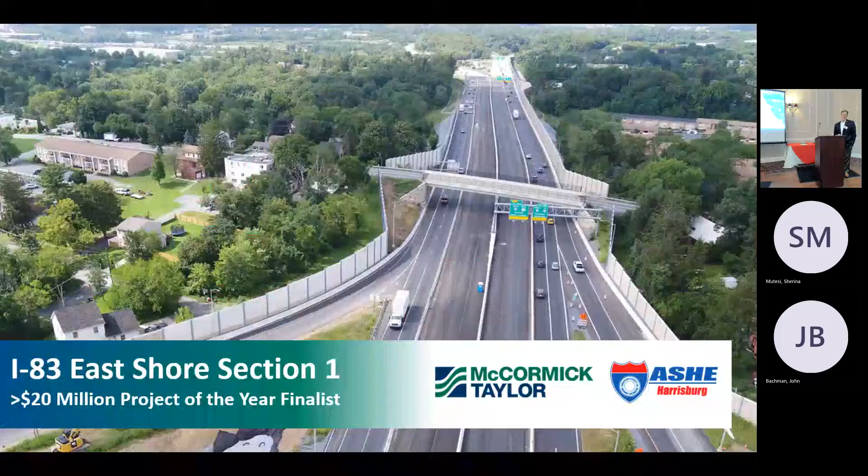The clicker is not working. I think it should work. You can try it. Okay. Just give me a minute. No, Alan's sitting behind you going, no, it's not going. Just say, next. We'll see. Just give me 1 second. I'm gonna share presentation. Okay, oops. We could just, there's only 6 or 7 slides, so. Here we go. Does your clicker work? Try. All right, I'll help you out. You could roll through them, no problem.

No, it's a pleasure to be here tonight. Pleasure to be recognized, to have McCormick Taylor recognized for the project. This is one of those projects that's really an industry project from my perspective. Matt here is the designer of record. He had a lot to do, obviously, with the project. This is one that, if you go to the first slide in the presentation, gives you a little sense of how long it was around.

As long as the clicker. Really good. We need to pull up some of the scholarship winners. Yeah. Try this again. There we go. Is that your first slide? Go ahead to the next one.

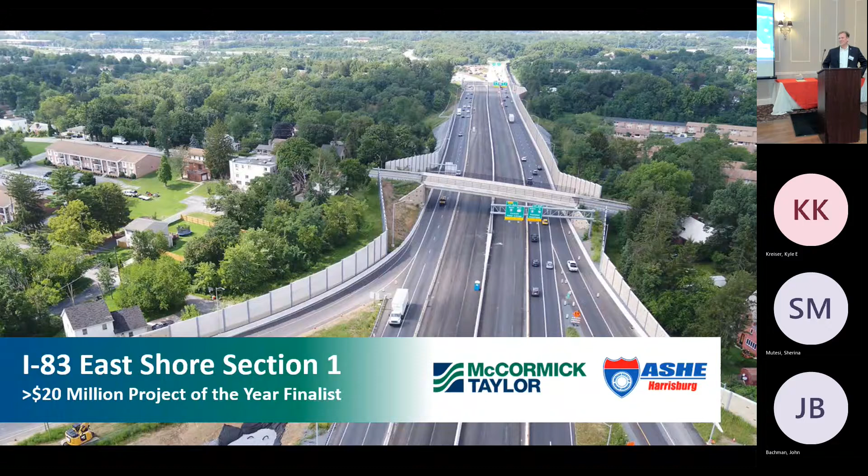The price of gas, $1.37. So we'd like to go back there, right? But that was one of the first photos that we found when we were looking through and doing the I-83 master plan. East Shore Section 1 did not start 20 years ago. It did not take that long to get going, but the master plan really created the foundation. The master plan was developed with a lot of good leadership from District 8, and the staff were there, and a lot of political support. Ron Marsico, Piccola, Schumacher, representatives and others.

There were a lot of interim projects that just spun out before we even got to East Shore Section 1. Safety projects; the corridor, as everyone knows if you've driven it, was a safety issue. A lot of tight ramps, yield control, the whole thing. So there were a lot of interim projects done, a lot of safety improvement projects that really led up to this. Like I said, these are really awards about the industry and how much of an impact. And I think all the scholarship award winners probably weren't even born when the master plan started, but it takes a long time to develop these types of projects.

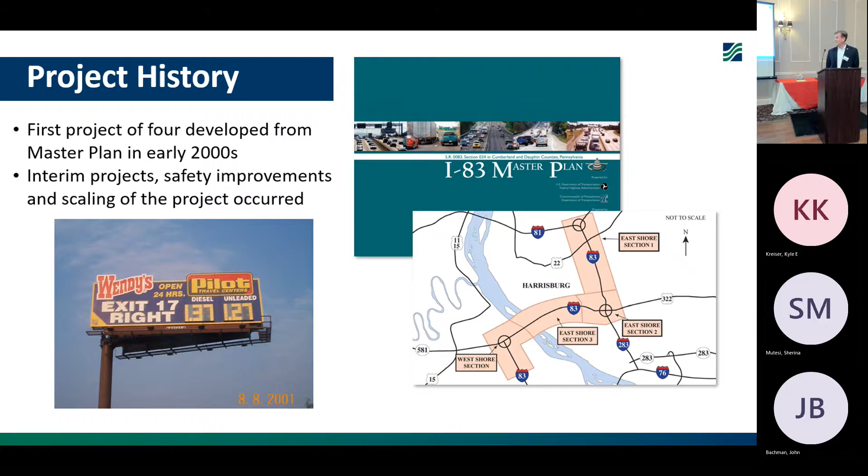East Shore Section 1 was $150 million construction in total. We got to the end. So go to the next slide, Jason. I'm just going to walk you through a few of the project details. The entire stretch here is shown in pink. That was the second contract. There was an early action, or contract one, shown in yellow. It really dealt with some of the interchanges and the overhead bridges on both sides. The pink or magenta on the screen was the main construction project, which involved the widening of 83, a single lane in each direction plus auxiliary lanes between Union Deposit and Colonial Park.

Early on, there was a lot of talk of an alternative analysis at Colonial Park at the 22 interchange, looking at continuous flow. At one point in the master plan, there was a flyover structure to handle the intersection there by the mall. But when it boiled right down to East Shore Section 1, we just did the widening and reconstruction, the overhead bridges. Again, reconfigured the Union Deposit Road interchange and then did a number of retaining walls and sound barriers and such. That's a little overview of the job. Like I said, $150 million, I think, between the two contracts and construction.

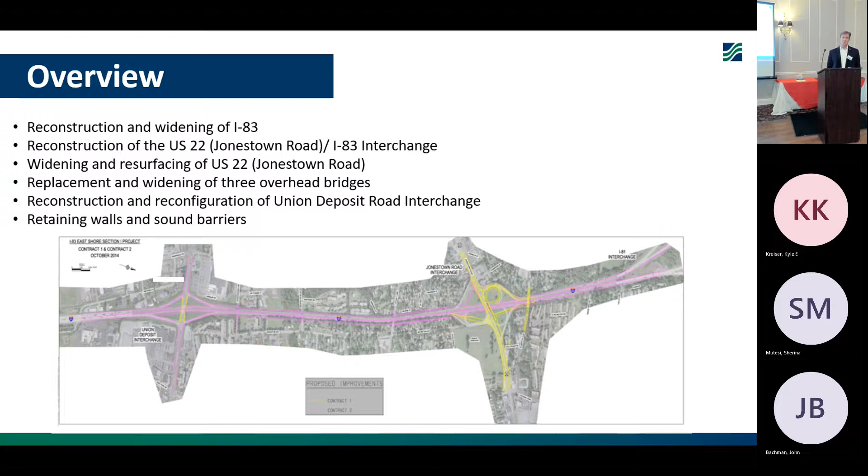Go ahead, Jason. High traffic volumes. We were at very high volumes, over, I think, 90,000 ADT at times. 113 parcels.

The traffic control sheet set was 300 plan sheets, so complex from a traffic control standpoint. John Schulz had a lot to do with that. Becky Meese, who's here, was involved in the preliminary, as was I, doing a lot of the traffic work and other things all the way through to the final design element and piece.

We had a team at the end. I'll go through all the subs and partners we had from a design team standpoint. Joe Thompson did a lot of the bridges and the mainline structures over 83, was responsible for those. So you can see the before and after on Revere Street.

I think we probably gave John Bachman, who was the PennDOT PM, a lot of credit for this job, and the whole I-83 corridor with his career. But we probably gave him some heart attacks with all the renditions of Revere Street and the right-of-way impacts and everything else we did there. It was a complex project for sure.

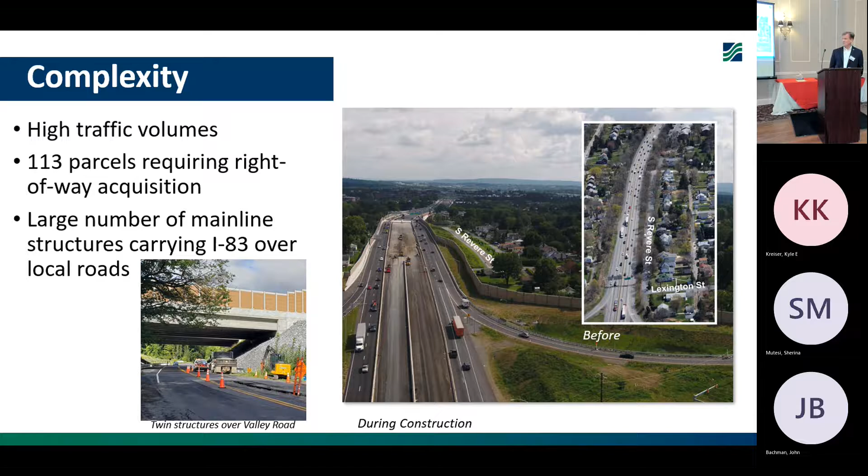Go ahead, Jason. We did some accelerated bridge pieces to get things in place and done earlier. The construction and phasing of the 22/83 interchange was unique and innovative. We did some early safety improvements there, reconfiguring the signals and ramps to get those built. If you remember, there used to be two on-ramps sequentially in the southbound direction — we eliminated some of those early. We also did variable speed limit signs during construction to help with traffic control and safety. Next slide, please.

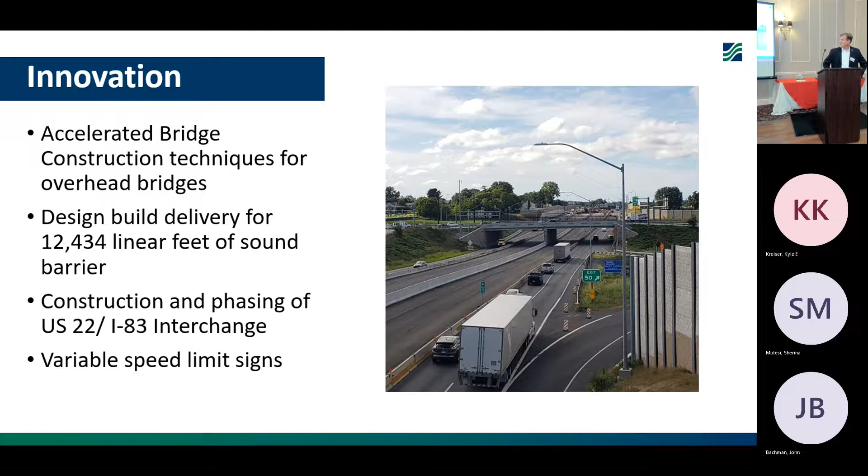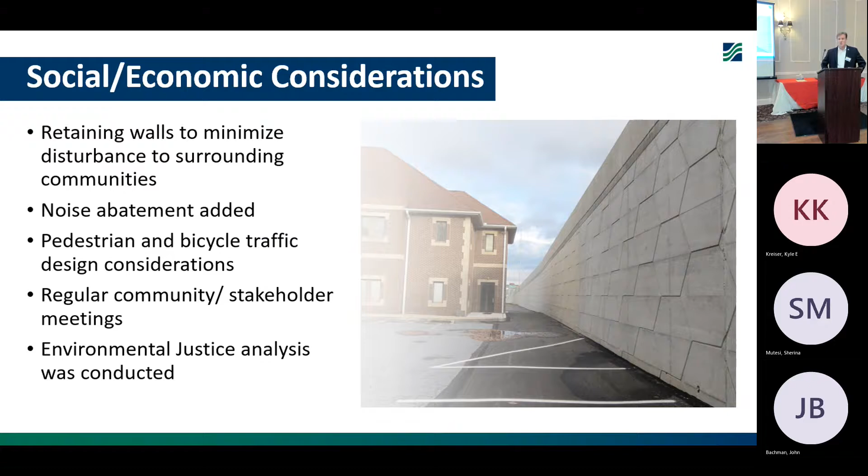We had some tight corridors. That's a retaining wall immediately adjacent to one of the buildings, from a right-of-way standpoint, with noise abatement throughout. The prior slide showed about 12,000 feet of noise walls, and pedestrian and bicycle accommodations on Elmerton — the 22 corridor was heavily used as well.

There were times during the slowdown from a funding standpoint where we packaged and repackaged the project. At one point, East Shore Section 1 was in 5 construction contracts — we broke it into 5 to keep it going and keep it moving. But through all of that, we maintained outreach to the public and made sure we were doing all the coordination needed with community and stakeholder meetings.

From a safety standpoint, we've had a huge crash reduction with the auxiliary lane connections between Union Deposit and Colonial Park. We've had a lot of impromptu comments from the community saying what used to be the worst stretch of roadway is now possibly the best. So from a community, social impact, and safety standpoint, this project — although it was a big investment of $150 million — I think made a huge impact on the number of vehicles it touched and the community improvements as well.

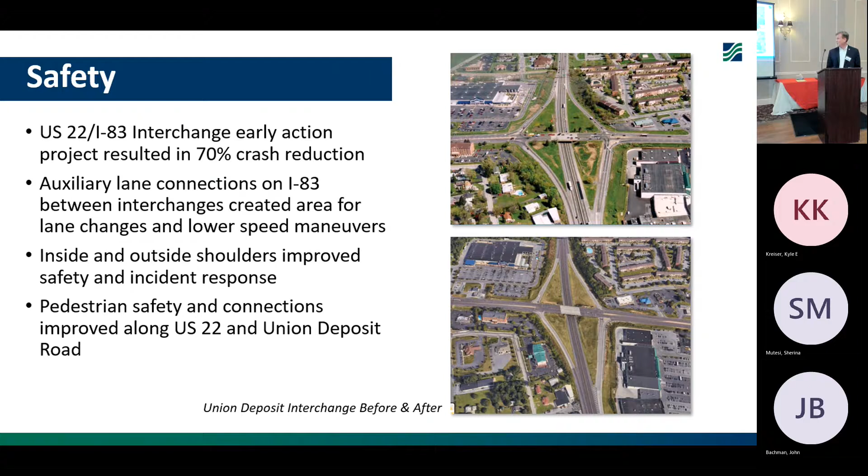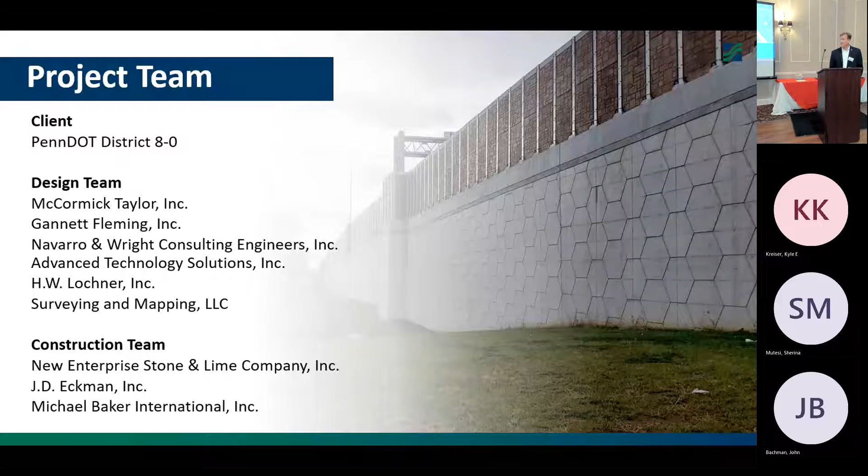The client was District 8. A lot of kudos go out again to John Bachman and the management team at District 8 over the years. Gannett Fleming was a major sub for us on the design team, along with Navarro & Wright, ATS, Lochner, and Sam. These things don't get built without the clients and the construction side of the shop — Baker was the construction manager on the job, New Enterprise had one of the contracts, and J.D. Eckman had the other.

Thanks, Brian. Yeah, I traveled that stretch today, and it'd be nice to get the Eisenhower interchange also done. We'll get there. I just can't believe the amount of truck traffic still, but that widening of 83 up through there really is nice. Everybody should be proud to be part of that project.

It was a great project, one of the largest projects in our ASHE district. The ASHE project awards cover the District 8 geographic boundaries basically, so those are the awards we give out by ASHE Harrisburg.

So our final award — and by no means the least award — is the first place for over $20 million, and that goes to the project I-83 Exit 4 Interchange Improvements, PennDOT District 8. The award-winning firm is Gannett Fleming. Accepting the award tonight is David Hamlet, Vice President, Highway Section Manager, who was also the project manager for the project, and assisting him is Nate Kirchner, Assistant Project Manager and Roadway Lead.

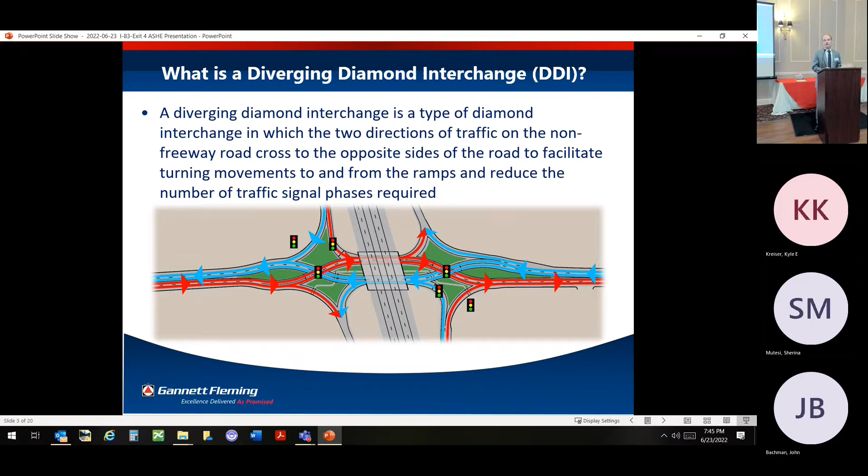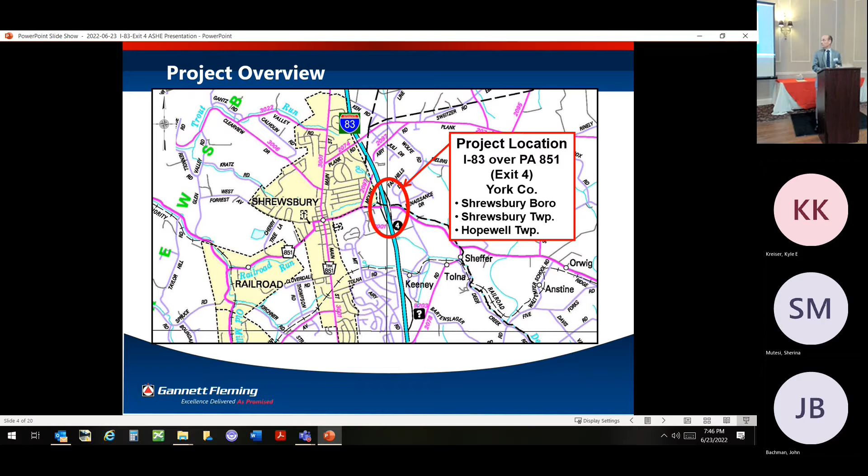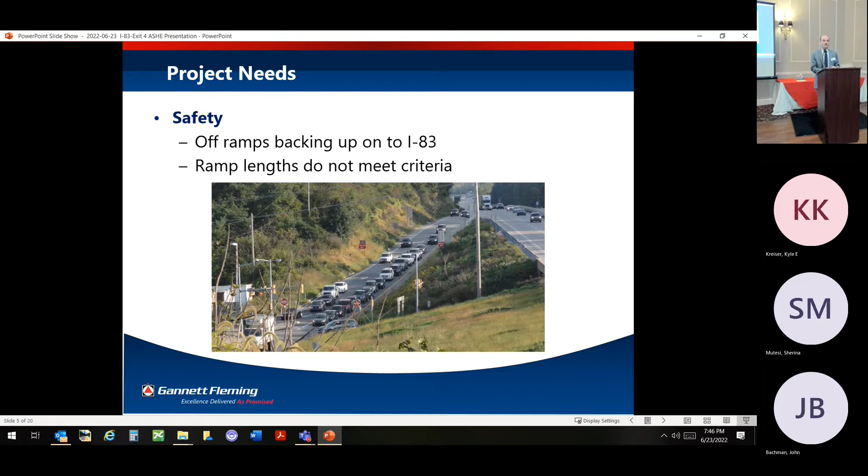Our project is the first exit on I-83 coming from Maryland, and that'll play a part into things a little later. As far as the reason for the project, the main reason was safety. Traffic was backing up onto I-83 in both directions, morning and evening, and that's a dangerous condition. Also, the ramp lengths didn't meet criteria. Congestion was a big issue - it was a real tight diamond design.

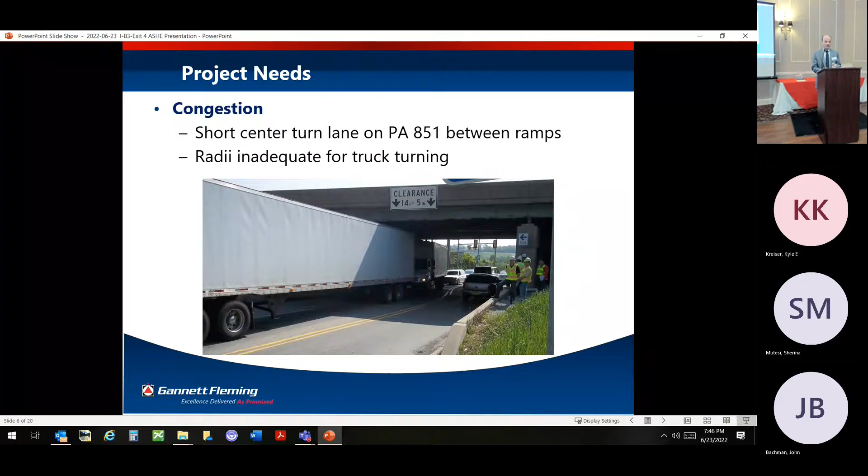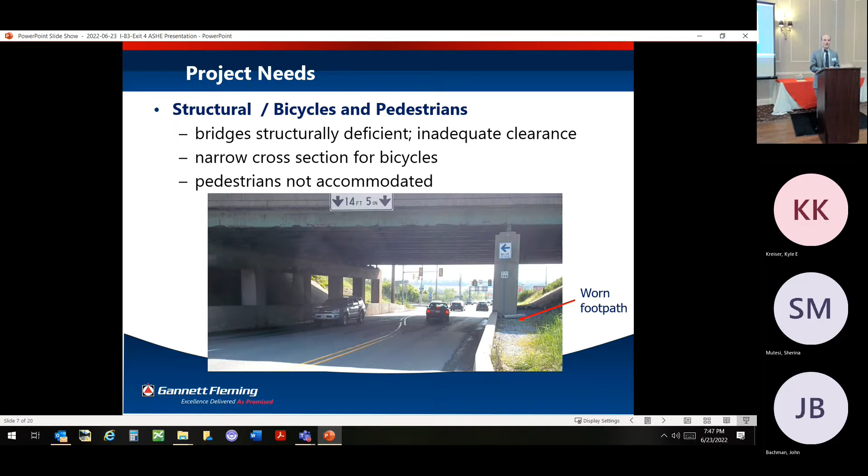The photograph shows you it only takes a truck or two to get the whole intersection clogged up, so congestion management was a big part of what we did. Trucks also couldn't make some of the turns - the geometrics just wouldn't allow it. On the bridge side, our bridge was structurally deficient, with substandard vertical clearance. And as you notice, there's no sidewalks, so it was really tight for bikes, with no place for pedestrians. These were all needs on the project.

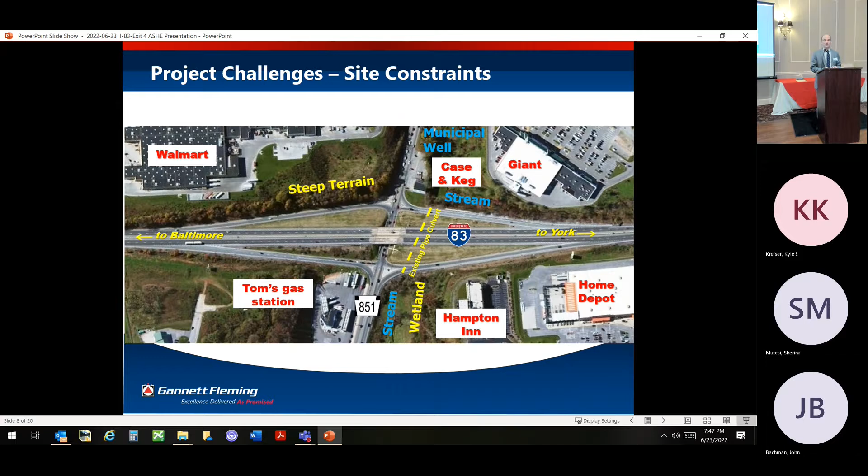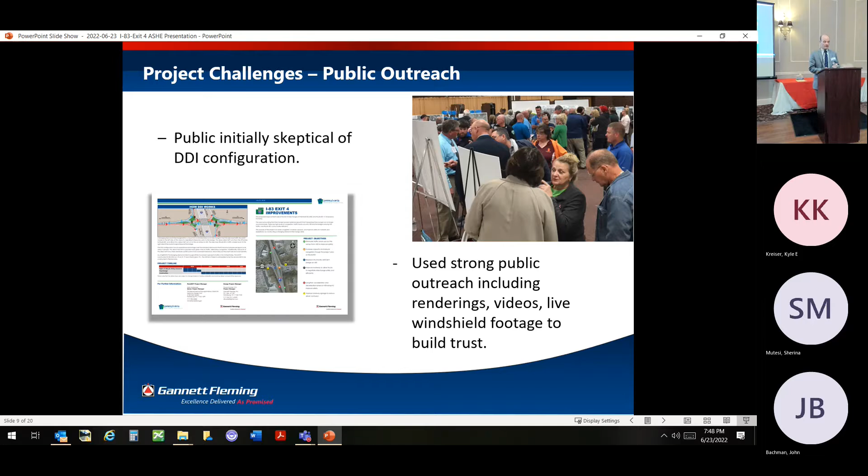Like the other projects, Herr Street and East Shore Section 1, this project had a lot of challenges. The first being site constraints with Walmart and Home Depot and so many businesses close by, plus natural features - streams and some steep topography that made it really difficult to get a design that would fit. Public involvement is always a challenge, but especially for a new idea. At the time, there was only one diverging diamond in Pennsylvania that had just opened as we got into the design process. So it was a new concept, and we had to sway public opinion, which we successfully did. That was definitely an important challenge to overcome.

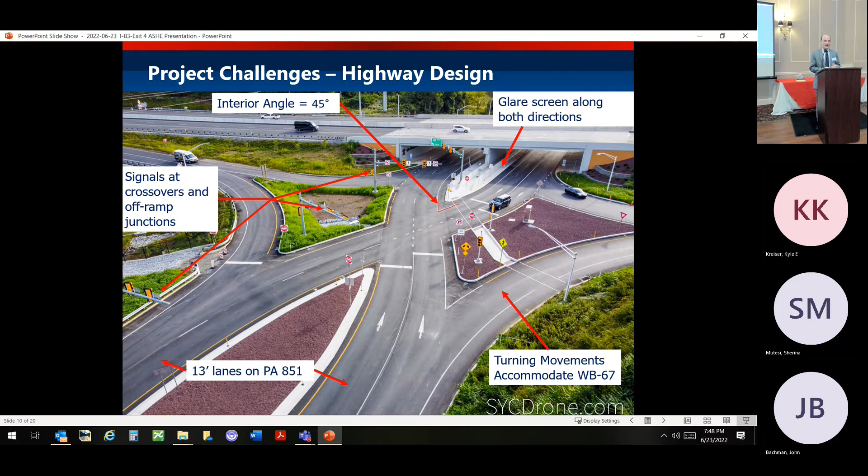Just the overall design of the DDI - there's a lot that goes into it, and Nate, our lead highway designer, could talk an hour just about this slide and everything he needed to do to get the diverging diamond to work properly. You can read the bulleted items there, but there's a lot of thought, a lot of science that goes into the DDI.

Structural challenges: we needed to maintain 4 lanes on I-83 at all times, which wasn't easy with the width of the existing bridge. We also needed to correct for the vertical clearance, so we raised up 83 a little bit. We did this through staged construction. We over-widened the bridges so they would allow for 6 lanes in the future. We also had a real long, deep culvert that went underneath the interchange, and that had to be replaced - that was a big challenge too.

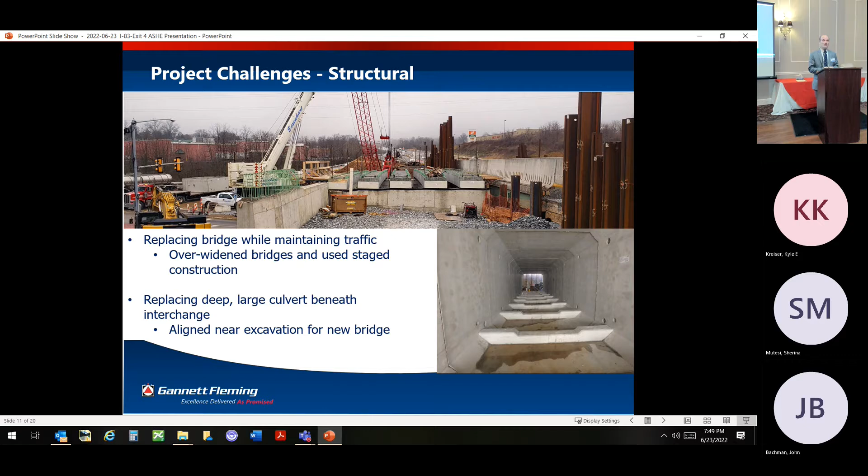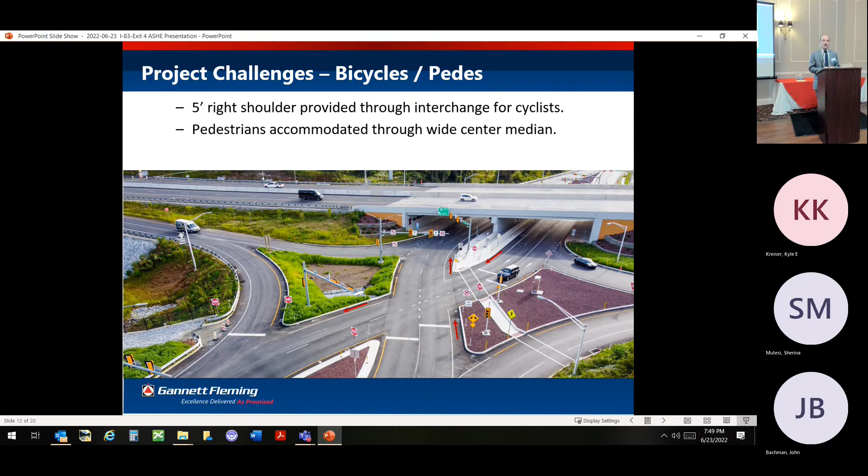The contractor had a lot of fun with the shoring and sheeting on that to get it constructed. Then for bicycles and pedestrians, we had a 5-foot shoulder through the interchange for the bikes. Because we had a wide median, we ran the pedestrians through the median under the bridge, and you can see the crosswalks taking them back out to the side.

Signing and pavement markings, again, a new interchange, a new concept. You need to pay a lot of attention to the details so that as you drive through, whether you're used to a DDI, whether you live in this area, or if you're out of town driving through for the first time, we want to make sure that it's clear and it's safe. So that was the challenge as well.

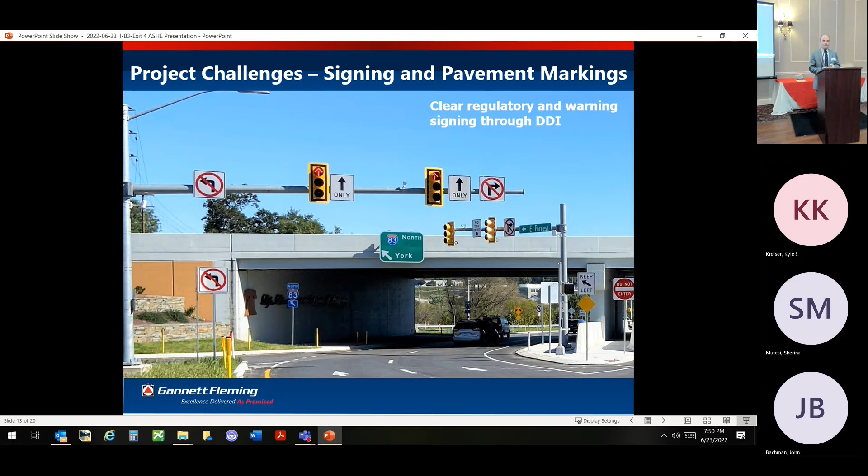Environmentally, we had bog turtles to deal with, making sure that no bog turtles were harmed by the project. We had a municipal well close by, so we had a detention basin, we lined it, we put a gate in there so that we could contain any spills that happen in the future. We worked really closely with the wellhead protection group also.

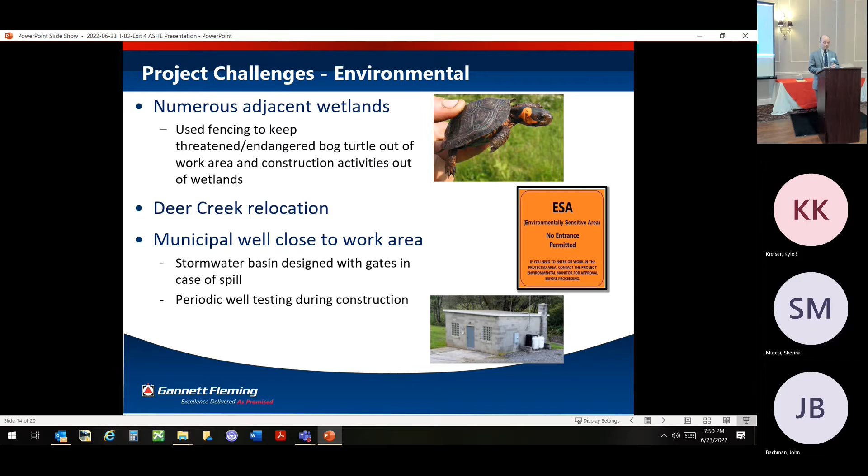And aesthetics, I think this is one of the things that really makes Exit 4 special. District 8 wanted to do something a little bit different since Exit 4 was the first interchange in Pennsylvania coming up from Maryland. They wanted a welcoming statement, so we came up with an Americana theme, and we wanted to be able to kind of soup up the interchange at a modest cost.

The VFW paid for the flag and the flagpole. There were a lot of civic organizations, and all 3 municipalities signed an agreement to help out. They'll take care of litter control, and they'll take care of the minor maintenance on all of the plantings, the shrubs, and keep the interchange looking nice.

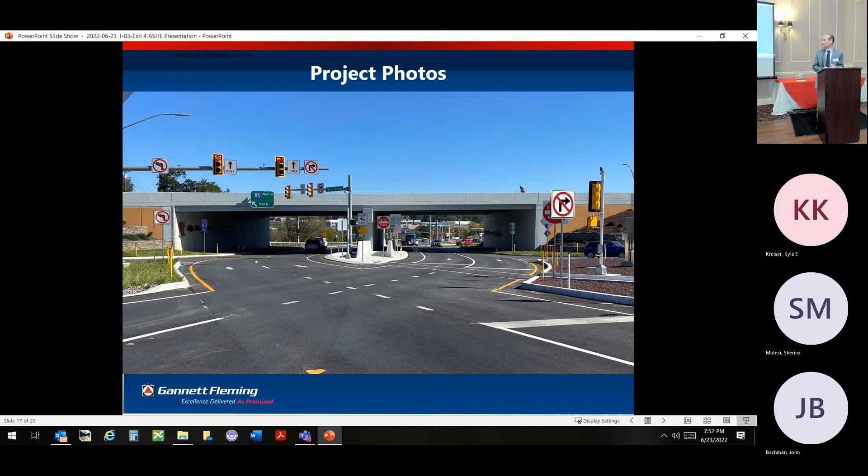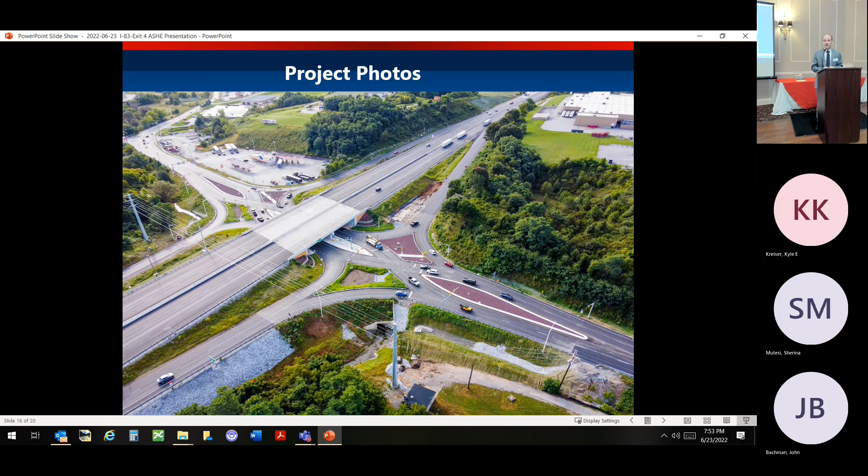So I'll conclude here with some photographs. Looking straight on at the diverging diamond, you can see the intersection where the side road lanes cross on PA 851. And then an aerial view - it's nice that we have drones these days, can get a lot of great photographs of the project. You can also see some of the red rock that we placed in the median for aesthetics as well.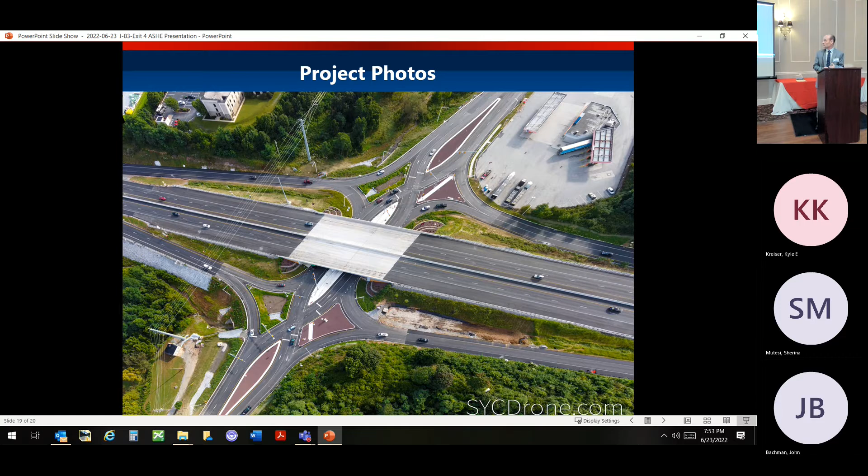Just another angle from up top at the completed DDI. You can also see the over-widened bridges on I-83 that will accommodate 2 more lanes in the future. And then the final photo here with the sun, a nice view of Exit 4.

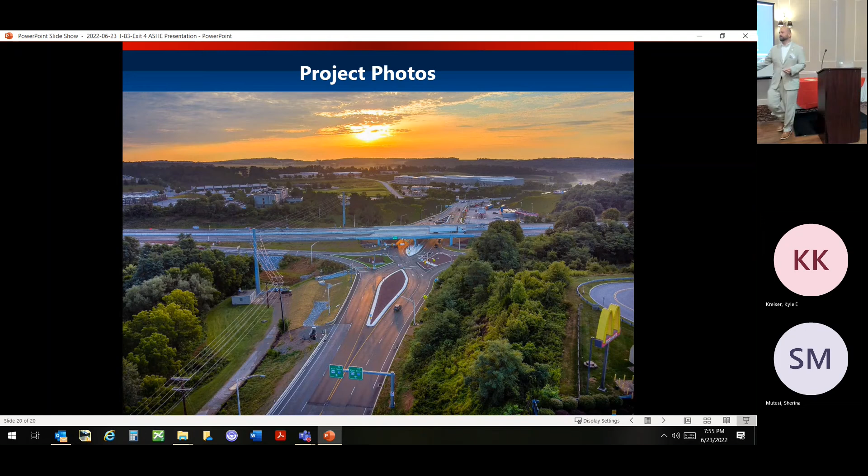All right, we do have some door prizes. I forgot the tickets, so does anybody have a birthday? Whose birthday is in June? We got more than one. Who's closest to the day? Today? Okay, happy birthday. Here's the door prize.

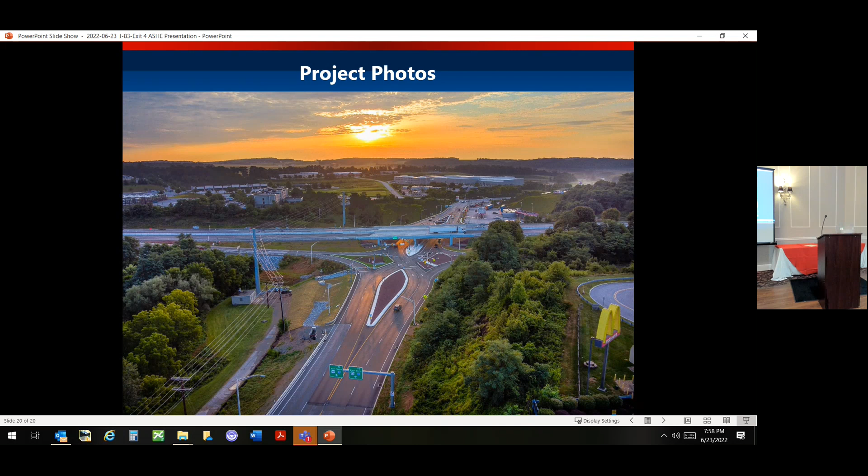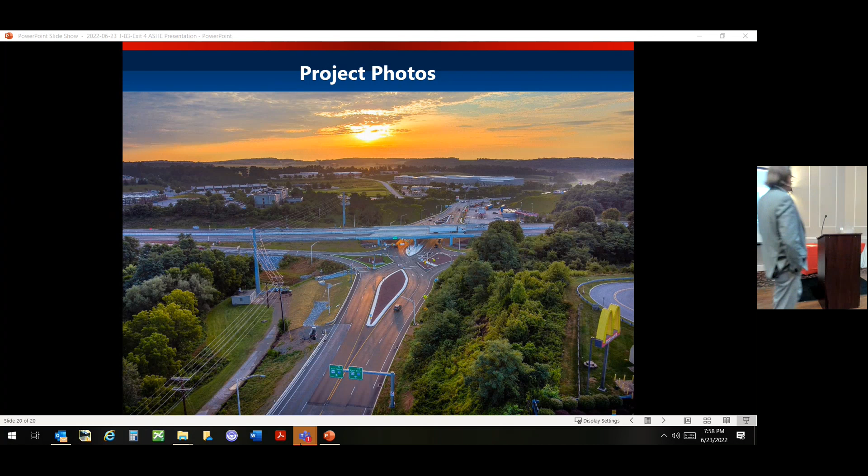Now I think everything... Oh.